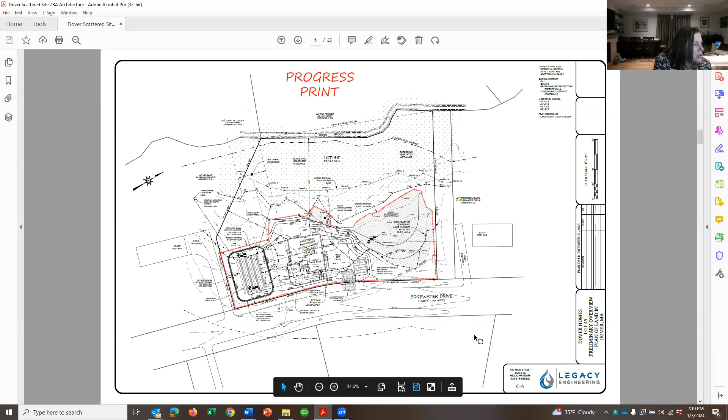Okay, so I'm going to go to lot 45, I believe. Is that where we are? Yeah, on Edgewater Drive. Lot 45, the bulkhead to the back right corner of the house, the HVAC units are on the left side wall of the house. And again, there's going to be some minor changes in limit of work and grading for the compensatory flood storage volumes that we're working on.

I think one of the things, and this sort of relates to the site walk, is that in a lot of the comments you can see that we're not working in the wetlands. I know there were some pictures that came through of a neighbor showing sitting water, but that's not where the properties are being disturbed.

So let me just see what else we've got here. We included some of the neighboring properties because some of the comments that came in from Cliff were that we were clearing the front of the lot, and this is the lot right next door. So we took a picture of that, and their lot is 100% cleared. This is another view of the front of the property being cleared.

So we sort of felt like when we went on the site walk, we were able to show that everyone else's properties had their foundation wall built up. So what we're doing, in our opinion and what Dan has put in his plans, is no different than what is happening at the neighbor properties.

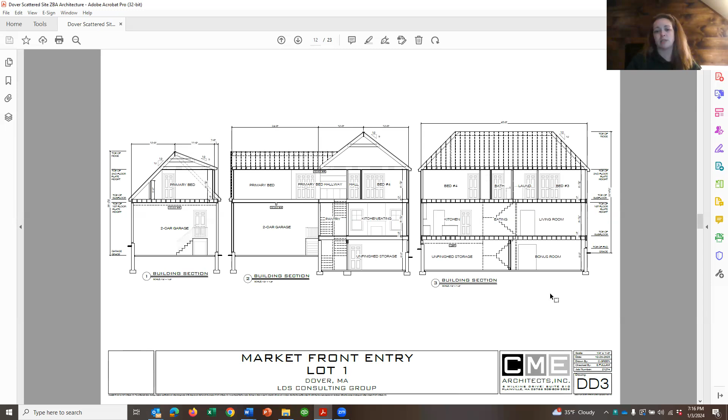I think you can go down to the next one, Lynn. Yeah, and all of these, again, we were updating. I think we had a misplaced render on one of the units, so we adjusted the units to match the front elevations for all of these.

We did give a couple options for colors, tried to change up the units that are next to each other, but we gave a couple variations for siding colors. This is the affordable unit where, based on the lot, we end up with basement sashes for our window light, so we still get some light in there.

If you go down to the next plan, Lynn, I think that will show the new basement, so they can see the unfinished space and the unfinished storage. They'll have plenty of room down there for storage for sure. And we added the windows in this unit as well, so that's all in there for the same for these. I think we had an update for the sections to show it was all the unfinished storage in the next slide as well.

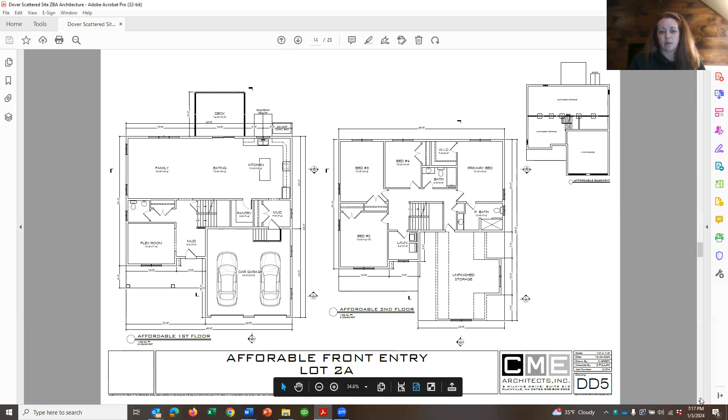Yeah, and that shows all the unfinished storage down in the basement. And this one doesn't have as much of a drop in foundation where everything comes up so high, so you don't have as much of a knee wall in this unit as you do in the other units.

I think you can go down to the next one, Lynn. Yep, and this is a side entry. This was adjusted for grading around the house and how we slope up to the house. So we did adjust this one mostly for the grading purposes, as well as the other couple comments for windows, etc. I think you can kind of scan through these ones a little bit, Lynn.

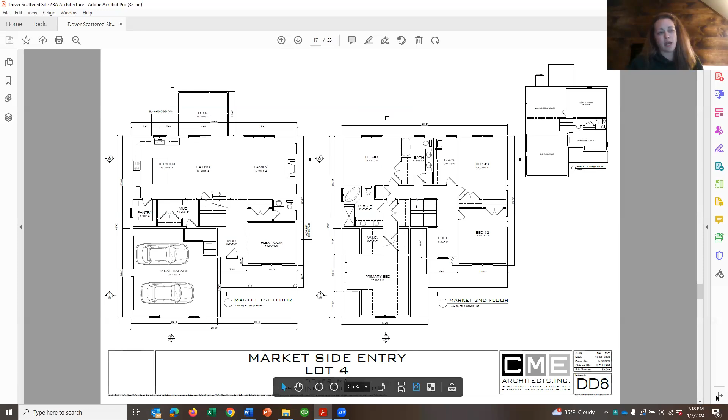This one also has the unfinished basement in it as well. And I think lot 45 was the last one that had a significant change to the rendering and front elevation, just to reiterate how we slope up from the house, how you'll have a retaining wall and slope up from the house with a couple steps as you walk from the driveway towards the front door. I think that was the biggest change for this one as far as those grading options. So shown in the rendering and shown a little bit more clearly in the 2D plans as well.

And this one is the one that has the most significant drop in the basement as well. So we do have the biggest window in this version for the bonus room, as that had the biggest drop in the back of the house.

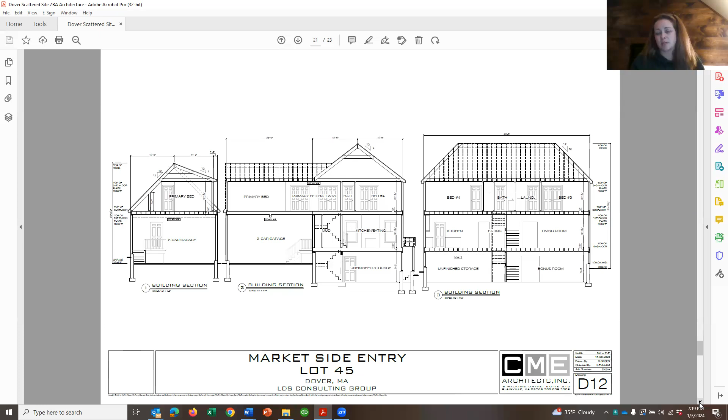So we've only got a couple more slides, and certainly we will share these with everybody. I know you're going to want to take a closer look at them, but the day that we went for the site visit, it was absolutely pouring. And so we did take some pictures. The other properties have standing water. It's just, it was 2 or 3 inches of rain. It doesn't last long, it gets absorbed.

And I don't know if Daniel, you want to talk a little bit more to that. No, I guess the only thought would be, obviously we had some major rain the day before and it was still raining when we went out there. So there were puddles all around the neighborhood, including on these lots. That's not unusual, and it's pretty typical for what you'd find if you drove around those neighborhoods in other parts of Dover that morning. You'd find similar circumstances in many places.

So I think that what we're doing on our property, and it's not required, is we are actually putting in stormwater management. And I don't know, Dan, that is actually going to try and control where that water is going and how it's going to be absorbed. And that's part of the review that is going back and forth between Sean and Dan at this point, which is that it's being looked at and hopefully planned for.

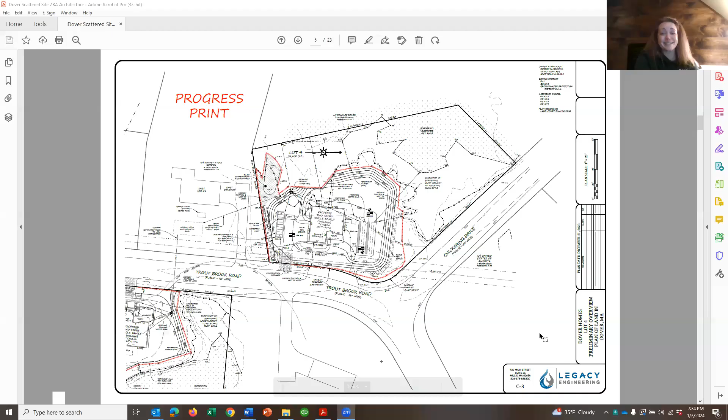While he's playing around I'll bring it up and run it through so you can see the different colors really quick, and extra ideas too, because I was like, oh my God, these are some good ideas to add into the plan. I did an invite of everybody that seems to be there, but I don't see them showing up.

So this is sort of a grayish sort of thing. Hold on a minute, Lynn. Hold on, I want to try and get people who are waiting in. I'll go back through it again. Grayish, but I don't see the invite working. And I have no idea why.

Ellen, for what it's worth, when I just clicked on the link I came right in. This didn't seem to be set up with a waiting room, so I'm not sure how anyone would have ended up in a waiting room. I don't understand that either. Let me email her my Zoom link and see if she can just click on that.

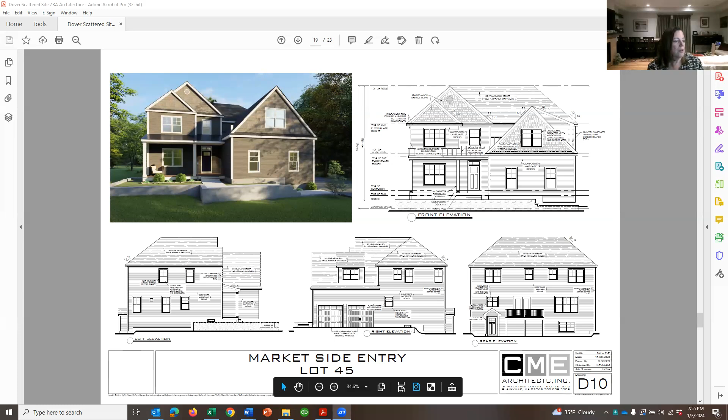Your elevations don't show the elevated septic systems.

Cliff has his hand up. I think when we were on the site walk, the sites are going to be built up because today they go down. That was one of the things we pointed out on the site walk - every site started by going down, so yes, they are going to be built up to get to street level. But I don't know if Cliff can do a better job of explaining this.

Yeah, the comment I wanted to make, and I completely agree on half of what's been said - these renderings now do, I think, accurately reflect everything that's proposed in the drawings. I looked at these pretty carefully. I think that, Lynn, you mentioned earlier on, connecting to this idea of providing this section that goes out to the street. I think it's easy from a technical perspective for people who are used to looking at technical drawings, to visualize what it really would look like from the street.

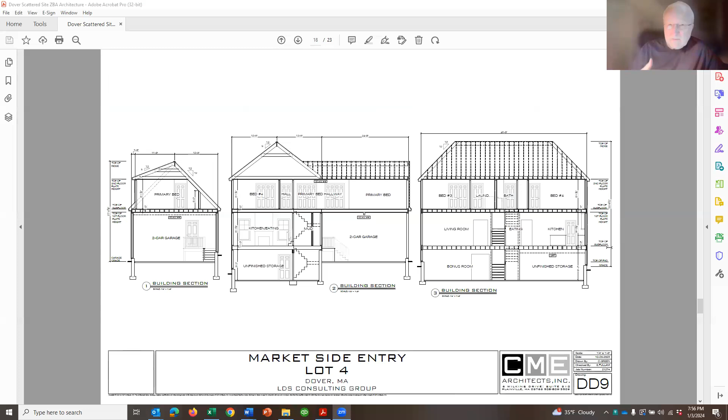So I think the chair's request for that section that goes out to the street, just as an analytical tool to see how it might be different from the many of the nearby homes, is not a big ask. I think these renderings are accurate from what I can tell, looking across between architectural and civil drawings.

But it connects back to what I was saying earlier, my goal is just people having a clear idea of what might be coming, and figuring out how to deal with that, which I think is doable. But I do think a more analytical drawing would help understand the difference between this proposal and the existing homes. I do really want to say, I think these are accurate perspectives. They might be taken from a little bit higher than where you'd actually see it from if you were standing out in the street.

I can't quite tell where the perspective point is. It looks a little high to me. So one way or the other, I think pushing that point a little bit further would be helpful in understanding how these homes may be a little different from the neighboring homes.

I think at this point, our focus is to respond to Sean's requests. And if there is any time left to provide additional drawings, we will consider it. But I think we felt that the drawings we have provided today, because the town has a technical consultant in Sean and in you, are what's on the table today. So I cannot make any promises. I feel like we fulfilled what we said we were going to do on the site walk, and in response to the comments we've received.

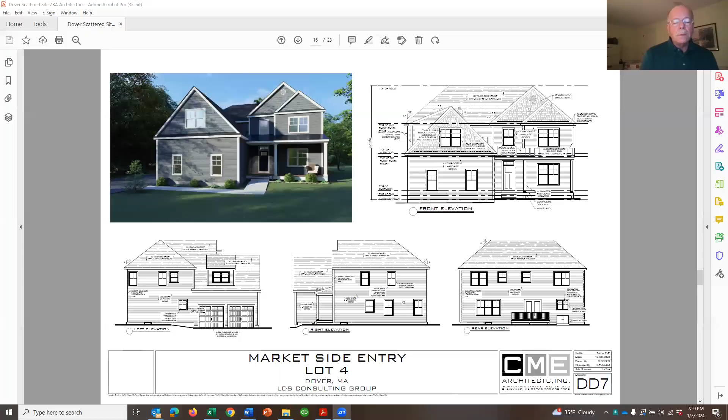Well, let me just say, Lynn, yes, we want you to respond to the comments from our peer review consultants, but if there are additional comments from the board, such as we've just been discussing, those need to be responded to as well.

I think if I understand what Cliff is saying, the drawings you've shown us, showing the front of the houses, you can't see the street, the edge of the street in those drawings, and depending on what the point of view is that those drawings are rendered from, that could be at some level above the street, so it doesn't accurately show what the houses are going to look like if you're standing on the street. I think that was the point of the site walk, to point all of that out, where things were going to be, how high they were off the street, and how they compared to neighbors that are many feet away.

So I don't know if Dan has anything more to add to this. Lynn, I understand what you're saying, and as I commented a minute ago, there were some comments, some discussion of this at the site visit, from representatives of the applicant about what the house next door to Trout Brook 2 looked like. And as I said, that's set much further back.

My impression, we couldn't have a discussion at the site visit because of open meeting law restrictions, as our town counsel has interpreted them and as the Attorney General's office interprets them. So we didn't have a back and forth. One concern I had, which I've expressed tonight, is it's not clear to me. I can't fully visualize from seeing a piece of tape wrapped around a tree trunk 40 feet back from the street where the top of the foundation is going to be, how that's going to look when the house is constructed, when you're looking at it from the street. So that's why I'm raising it now.

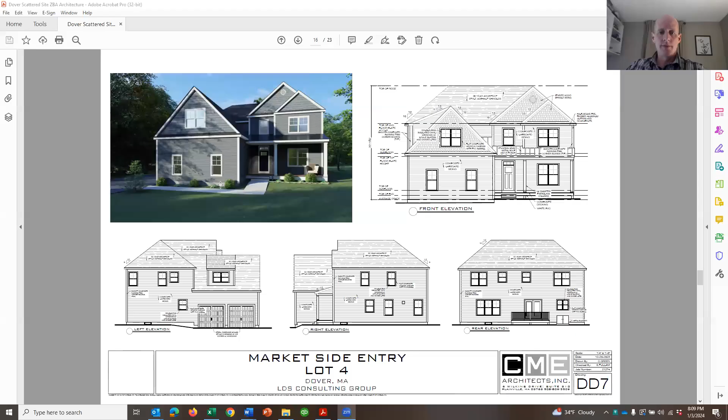Yes, just to respond to the comments made: the flags installed on the site were at the top of the concrete foundation, not the bottom. That is the concrete foundation of the house, not the finished grade around it. As Lynn noted, finished grade is typically 18 to 24 inches below the top of the foundation wall. So the top of the foundation wall is about 5 feet above the street, meaning the finished grade around the house is only 3 feet above the street. If you study the site plans, the garages are set down a couple feet from the main foundation wall, so those garage doors and driveways are only 1 or 2 feet higher than the street.

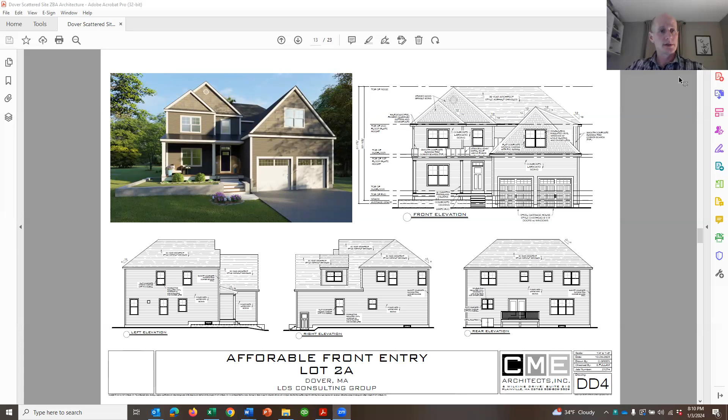So it's not going to be an elaborate slope up from the street to the garage doors or front door. With respect to septic systems, state regulation requires the design include a reserve area that could be used if the septic system failed in the future. So you basically have room in any design approved by the Board of Health to build essentially two septic systems in the plan.

Yeah, we'll get input from Sean on that, hopefully next time.

I understand your comments, and I have no desire to... I'm hoping the visual impact is as you describe. It would just be nice to see something that makes that clear. And if that can be done fairly easily, as Cliff is suggesting might be possible, that'd be terrific.

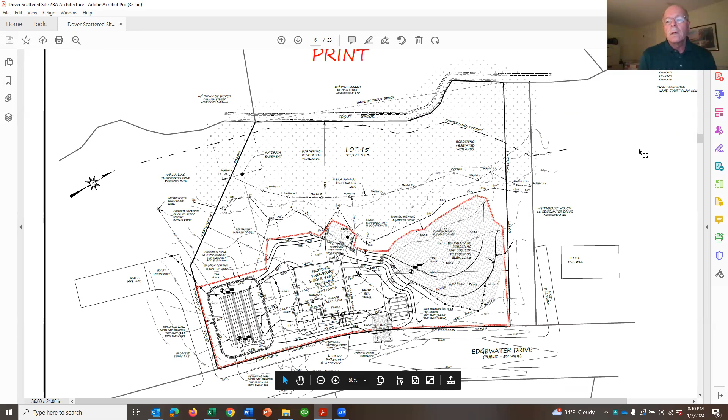Mike, I have several more issues I'd like to bring up, okay?

Septic systems on lots 1A and 2A are back to back, and you essentially have one giant 8-bedroom system. It's also elevated up about 6 feet, I think Dan said. He can verify that, or tell us how far up the septic system is elevated from ground level.

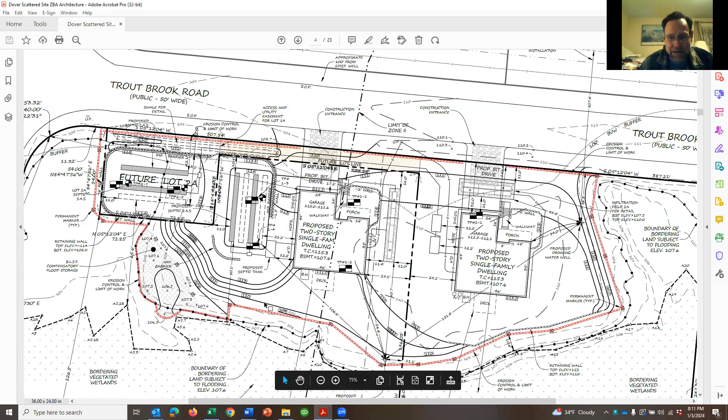Sure, the grade over the septic system for lots 1 and 2 will be 4 to 5 feet above the road. Okay, I got you. Thank you.

One thing that concerns me is you have a lot of effluent in a relatively small area, and the water table is relatively close to the surface. What impact does that have on drinking water? Will there be a need to drill monitoring wells to make sure nitrogen levels don't get too high into neighboring waters, the water wells?

No, so Title 5 has... could you mute yourself? Yeah, Mike, you need to mute.

Okay, so Title 5 has specifics. Title 5 is the state regulation for septic system designs. It has specific requirements for how high above the groundwater table the septic system has to be, which is why they're elevated above the ground. All of the treatment occurs in the area between the bottom of the leaching trenches and the high groundwater table, and that's all prescribed in state regulation.

The state has regulations that specifically address requirements for the amount of effluent that can be disposed of on a given lot if there are drinking water wells on the same lot, and these septic systems would comply with those requirements. So the state regulations take into consideration that there are drinking water wells on these lots and surrounding lots, and each septic system will be designed in accordance with state regulations, which we're obligated to do.

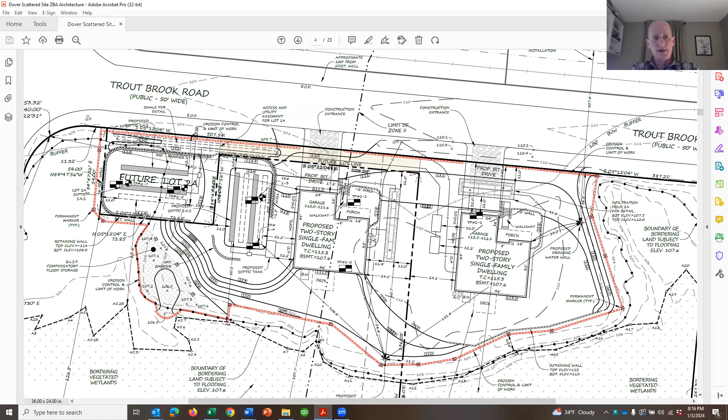So essentially it's like pouring a bucket of water out on top of the ground. The effluent is basically just water, and it enters the leaching trenches. A leaching trench is simply a rectangular trench filled with crushed stone with a perforated pipe in it. So you dump the water into the distribution box and it flows into these trenches. Essentially, a bacteria mat grows at the bottom of the leaching trenches. This is fundamental septic system operation and design. It applies universally to all kinds of septic systems. You get a biomat at the bottom of that crushed stone trench, and that biomat is what treats the effluent.

So I disagree with characterizing it as a pressure head. You can have a pressurized effluent distribution system, but again, as soon as the water leaves the pipe, whether it's a pressurized distribution system or a gravity system, it's no longer pressurized. It's at atmospheric pressure.

I'm not talking about something pushing down on it. The water is going to sit at a height. This is ground level, and you're going to have a height of water above it, probably about 2 or 3 feet, you said?

The water goes through the trenches, through the soil. The water comes out of the bottom of the leaching trench and flows vertically down from the bottom of the trench until it hits the groundwater table, then distributes laterally. This is what all septic systems do. All septic systems, except old ones, all new septic systems are above the groundwater table by a minimum of 4 feet, and in some cases 5. That's required by state law.